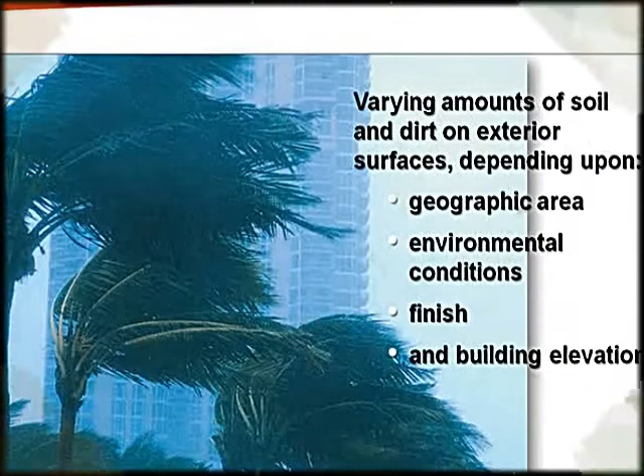Whether painted or anodized, architectural aluminum finishes require care before, during, and after installation. Both types of finishes are resistant to corrosion, discoloration, and wear. However, harsh chemicals, abuse, or neglect can mar the finish. All exterior surfaces collect varying amounts of soil and dirt, depending on factors such as geographical area, environmental conditions, finish, and building elevation.

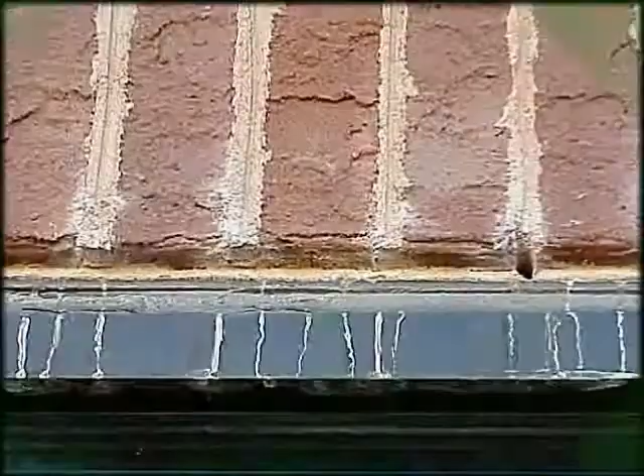Periodic maintenance inhibits long-term accumulation of soil, which can accelerate weathering of finishes. Frequent cleaning of finished aluminum that is exposed to harsh marine environments is particularly important. For efficiency and economy, glass and aluminum cleaning should be scheduled at the same time.

It is recommended that cleaning of architectural aluminum be scheduled at least annually and possibly more frequently, depending upon geographic area, industrial location versus rural location, rainfall amounts, foggy or coastal regions where condensation and drying cycles create atmospheric salt and dirt deposits, and recessed or sheltered areas lacking rainfall and encouraging condensation that increases soil adhesion.

When using any cleaning product or chemical, review the manufacturer's or supplier's material safety data sheets or the general safety instructions supplied, and follow the recommendations for precautions and personal protective equipment. All manufacturer safety precautions for fall protection and/or fall restraint should be followed when using scaffolding or a suspended lift. General cleaning.

Certain precautions must be taken when cleaning painted and anodized surfaces. Select the appropriate cleaning method after identifying the finish. Do not use abrasive household cleaners or materials like steel wool or hard brushes that can wear and harm finishes. Excessive abrasive rubbing should not be used since it can damage the finish. Avoid drips and splashes and remove rundowns as quickly as possible. Consider the effects of rundown on shrubbery, personnel, and equipment, and schedule cleaning appropriately.

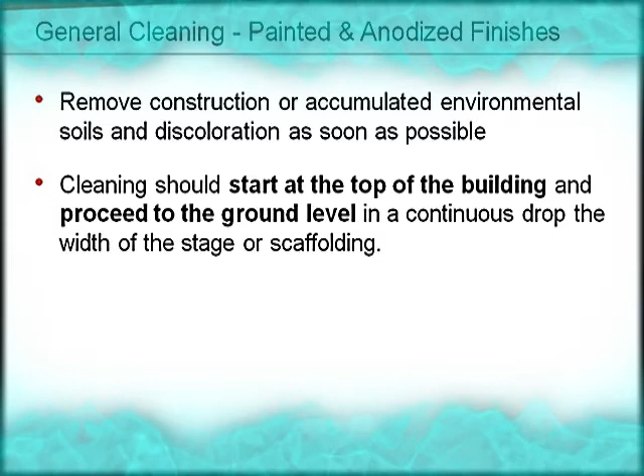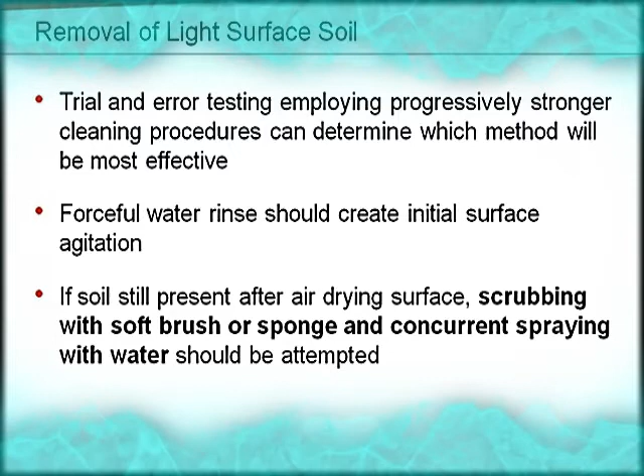Cleaning should start at the top of the building and proceed to the ground level in a continuous drop the width of the stage or scaffolding. The type of procedure used depends upon the degree of soiling, and each will be discussed. Trial and error testing employing progressively stronger cleaning procedures can determine which method will be most effective. A forceful water rinse should create initial surface agitation. If soil is still present after air drying the surface, scrubbing with a soft brush or sponge and concurrent spraying with water should be attempted.

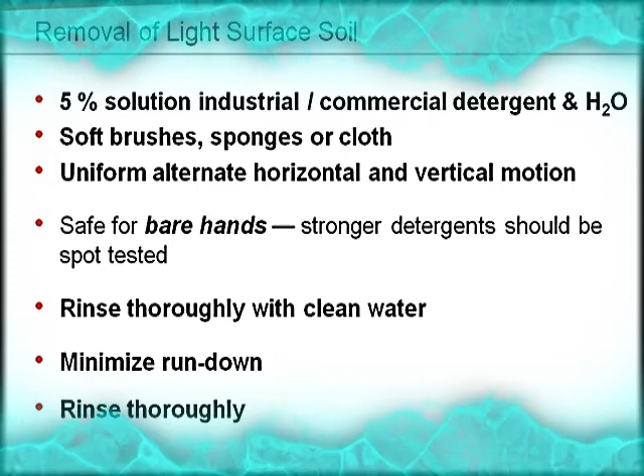A 5% solution of industrial or commercial detergent and water should be applied with soft brushes, sponges, or cloth using uniform alternate horizontal and vertical motion. Detergents should be safe for bare hands. Stronger detergents should be spot tested. After washing, the surface should be rinsed thoroughly with clean water and allowed to dry. Do not allow detergent solution to dry on aluminum. Cleaner rundown should be minimized and rinsed immediately. A thorough rinse should remove solution from joints, crevices, and surfaces.

If it is necessary to remove oil, wax, polish, or similar materials from anodized finishes, MEK, mineral spirits, or an equivalent solvent is recommended. Use with extreme caution on painted surfaces. Contact should be limited to a maximum of 1 minute, and a test should be carried out prior to use. Manufacturers are not responsible for damage from unrestricted use.

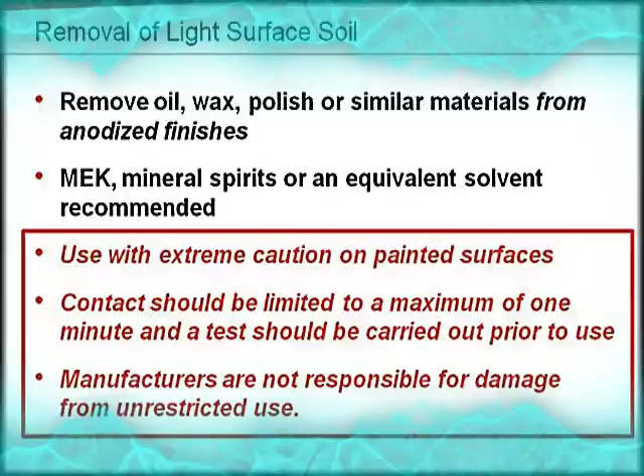Solvents can be used to remove non-water soluble deposits such as tar, grease, oil, paint, and graffiti. However, extreme care should be used when using solvents on painted surfaces. Many solvents will reduce the gloss level of painted finishes and, if allowed to remain on the finish for more than a few minutes, may soften the paint and damage the coating. It is suggested that the painted area that comes into contact with a solvent be limited as much as possible.

Extreme care must be exercised when solvents are used, since they may damage organic sealants, gaskets, and finishes. Solvents should never be used on anodic finishes protected by clear organic coatings, such as lacquer, unless the organic coating has deteriorated and is to be removed.

Organic solvents should be used only in accordance with manufacturer's safety recommendations. Most organic solvents are flammable and/or toxic and must be handled accordingly. Avoid open flames, sparks, and electrical motors, and use adequate ventilation, protective clothing, and goggles.

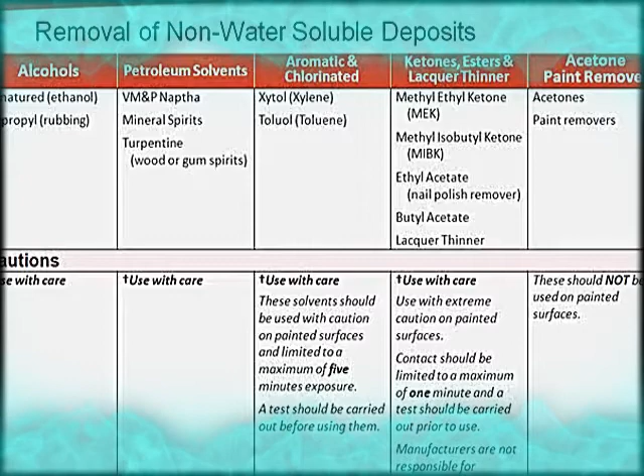To clean painted finishes, try the following steps. Sodium hypochlorite solution, commonly known as laundry bleach, may assist in removing certain stains from painted finishes. Hydrochloric acid or 10% muriatic acid diluted with 10 volumes of water may assist in removing rust or alkali mortar stains from Fluropon or Duranar surfaces. Limit contact to 5 minutes. Caution: acid solutions are corrosive and toxic.

Also note, while both laundry bleach and hydrochloric acid might be suitable for some cleaning, they should not be mixed together because chlorine gas could be emitted. Flush all surfaces immediately with water after use. Acetic acid, common vinegar, or oxalic acid solutions may be used for the same purpose. Flush with water. Anodized surfaces should not be washed with acidic or caustic solutions.

To remove mildew from painted aluminum finishes, try a basic solution of 1/3 cup detergent, 2/3 cup trisodium phosphate (TSP), 1 quart sodium hypochlorite 5% solution laundry bleach. Rinse with clear water immediately after application.

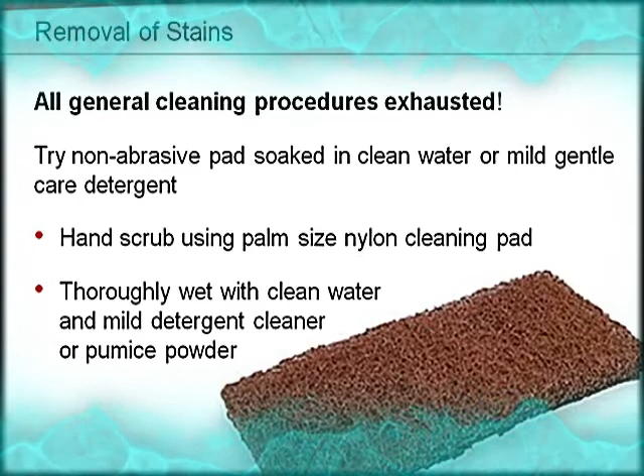Once all the general cleaning procedures have been exhausted, cleaning with a non-abrasive pad soaked in clean water or a mild detergent cleaner may be tried. Again, try the following only after all general cleaning procedures have been exhausted. Using uniform pressure, hand scrub the metal surface using a palm-sized nylon non-abrasive cleaning pad. Thoroughly wet with clean water and a mild gentle care detergent cleaner such as Bon Ami or pumice powder. Start at the top and work down, rubbing in the direction of the metal grain.

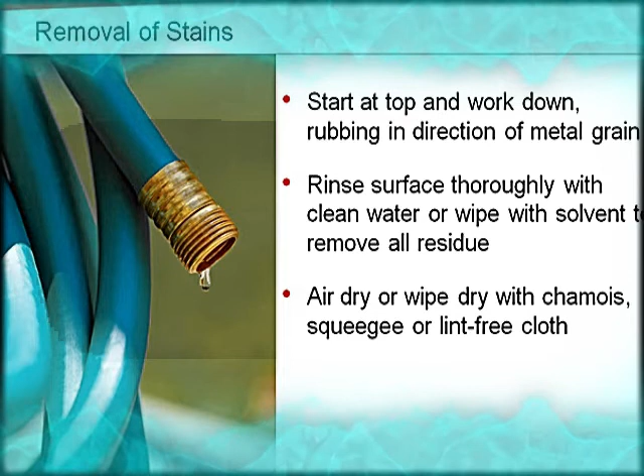After scrubbing, the surface should be rinsed thoroughly with clean water or wiped with solvent to remove all residue. The surface should be air dried or wiped dry with a chamois, squeegee, or lint-free cloth, particularly if cleaner has dried on the surface.

A power cleaning tool such as an air-driven reciprocating machine fitted with cleaning pads may be necessary for removal of unusually heavy soils. During this operation, the surface being cleaned must be continually wetted with clean water or a mild detergent cleaning solution to provide lubrication and a medium for carrying away the dirt. The machine should move in alternating vertical and horizontal strokes.

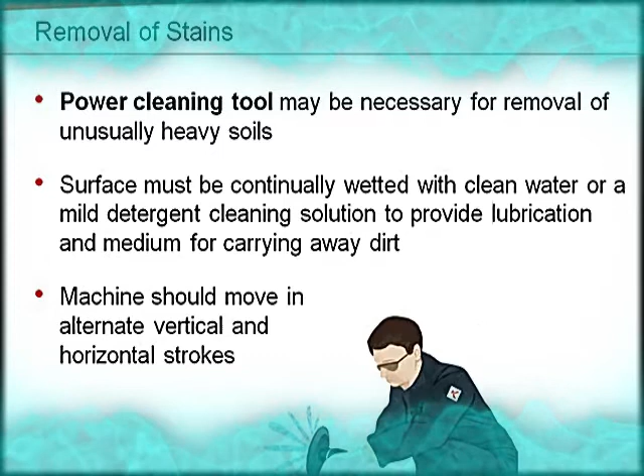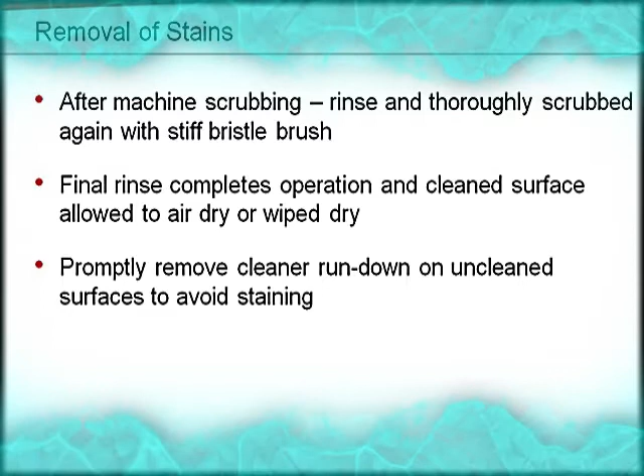After machine scrubbing, the area should be rinsed and thoroughly scrubbed again with a stiff bristle brush. A final rinse completes the operation, and the clean surface is allowed to air dry or is wiped dry. It is important to promptly remove cleaner rundown on unclean surfaces to avoid staining.

When cleaning aluminum, always try the method being used on a small, inconspicuous area first. Always work from the simplest to more aggressive cleaning methods. For more information about cleaning aluminum, refer to AAMA 609 and 610-02, Cleaning and Maintenance Guide for Architecturally Finished Aluminum.